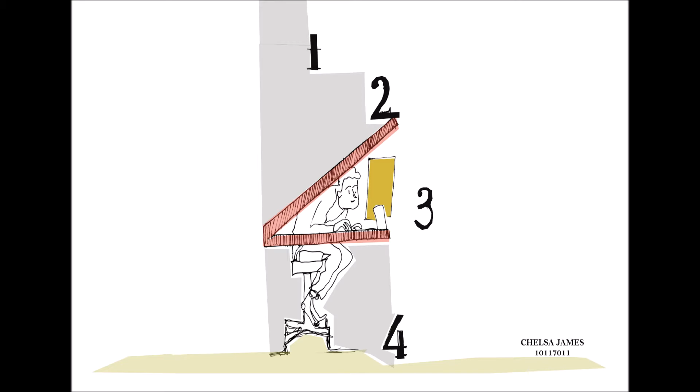The topic I have undertaken is rethinking the design of residential schools in view of the pandemic COVID-19. On March 11, 2020, the World Health Organization declared the spread of the COVID-19 outbreak a pandemic, and WHO reiterated the call for countries to take immediate actions and scale up response to treat, reduce the transmission, and save people's lives.

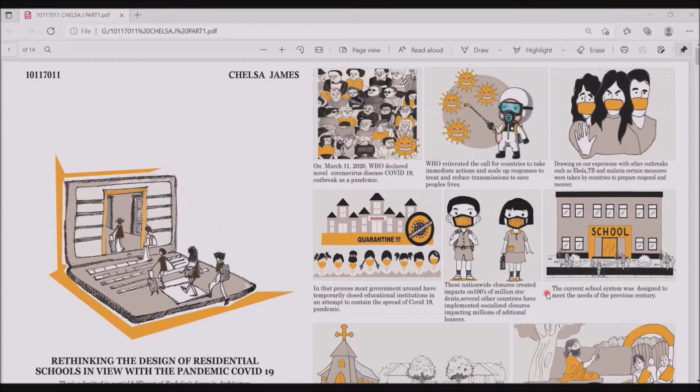Drawing on experience with other outbreaks such as Ebola, TB, and malaria, certain measures were taken. One such measure is closing down educational institutions to contain the spread of COVID-19. These nationwide closures impacted millions of learners. If we look, we can see that the current school system was designed to meet the needs of the previous century. If we look back, schools were very small operations in religious centers like churches, temples, or homes.

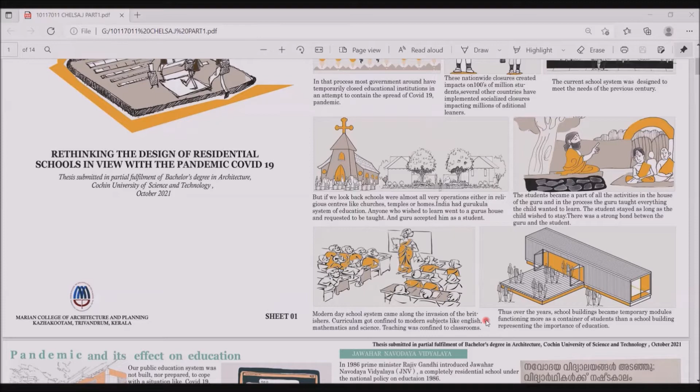India had the Gurukula system of education, which made students become a part of all the activities in the house of the Guru. The modern-day school system and curriculum got confined to modern subjects like English, maths, and science. Thus, over the years, school buildings became temporary modules functioning more as a container of students than a school building representing the importance of education.

Pandemic and its effect on education. Our public education system was not built nor prepared to cope with a situation like COVID-19. We lack the structures to sustain effective teaching and learning during the shutdown. In this process, children's academic performance is deteriorating during the pandemic, along with their progress on other developmental skills. COVID-19 resulted in the largest online movement in the history of education.

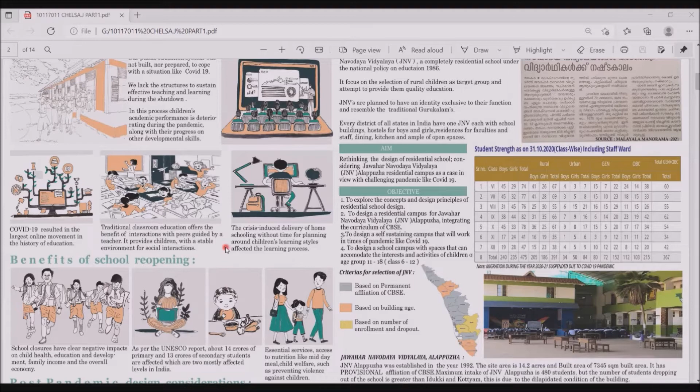Traditional classroom education offers the benefits of interaction with peers guided by a teacher. It provides children with a stable environment for social interaction. The crisis-induced delivery of homeschooling without time for planning around children's learning styles affected the learning process. School closures have clear negative impacts on child health, education, development, family income, and the overall economy.

In 1986, Prime Minister Rajiv Gandhi introduced Jawahar Navodaya Vidyalaya (JNV), a completely residential school under the National Policy on Education 1986. It focused on the selection of rural children as a target group and attempted to provide them quality education. Every district of all states in India has one JNV each, with a school building, hostels for boys and girls, residences for faculty and staff, dining, kitchen, and ample open space.

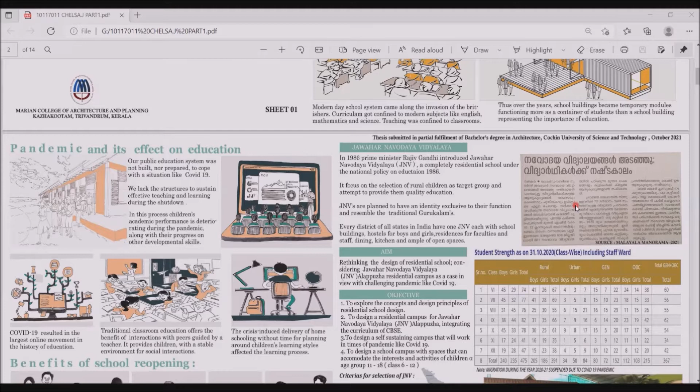This is a newspaper clip which states how children of JNVs were affected during the pandemic. In spite of being completely residential schools, these were shut down, which led me to study more about JNVs. The aim of my project is rethinking the design of residential schools, considering Jawahar Navodaya Vidyalaya, Alappuzha residential campus as a case in view of a challenging pandemic like COVID-19.

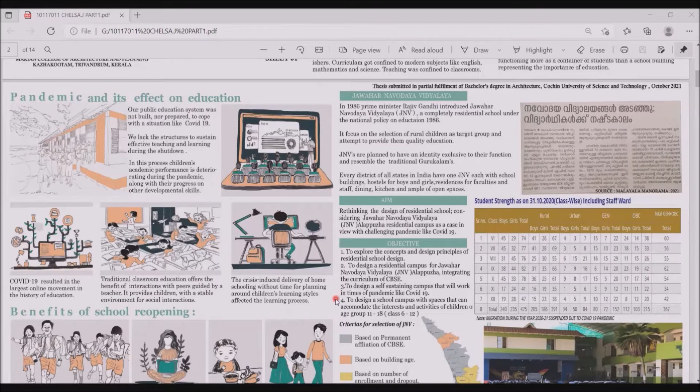And the objective remains to explore the concept and design principles of residential school design, to design a residential campus for JNV Alappuzha integrating the curriculum of CBSE, to design a self-sustaining campus that will work in times of a pandemic like COVID-19, and to design a school campus with spaces that can accommodate the interests and activities of children of age group 11 to 18. Criteria for selection of the JNV were based on permanent affiliation of CBSE, building age, and number of enrollments and dropouts.

JNV Alappuzha was established in the year 1992. The site area is 14.2 acres and the built area is 7,345 square meters. It has provisional affiliation of CBSE. Maximum intake of JNV Alappuzha is 480 students, but the number of students dropping out of the school is greater than Idukki and Kottayam. This is due to the dilapidated condition of the building.

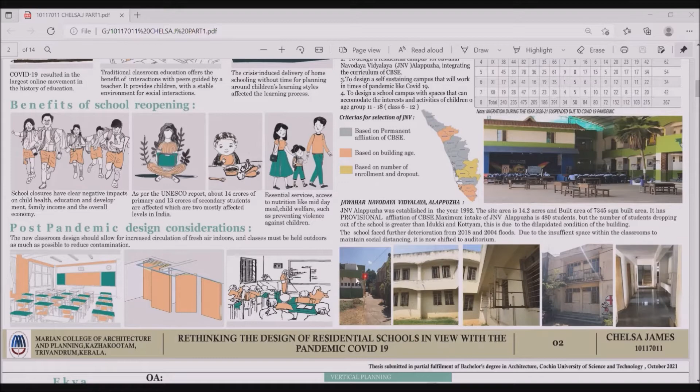The school faced further deterioration from the 2018 and 2004 floods. Due to insufficient space within the classroom to maintain social distancing, it is now shifted to the auditorium. And the school authority has planned a proposal for a new school building before the Navodaya Samiti, which strengthened my reasoning for choosing the school.

Moving on to the case study, the first one is Ekya, Bangalore by architect Sanjay Mohe. The attempt to create spaces that would understand the scale and energy of a child using elements of colors and varying volumes of building became the reason for choice. The types of spaces created within the school in varying forms, such as the OAT and playgrounds, evolved as a solid platform for learning through discussion.

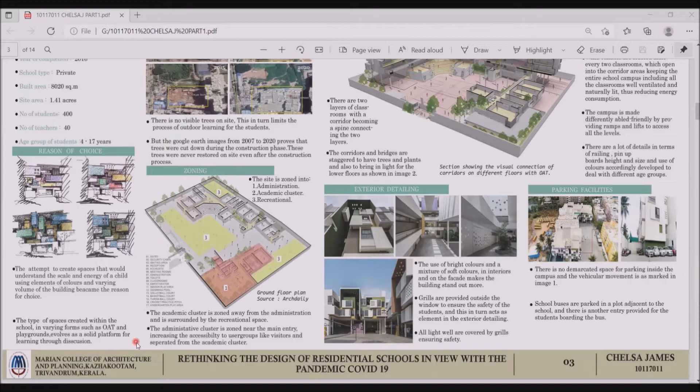The site is zoned into administration, academic cluster, and recreational. There are two layers of classrooms with a corridor becoming a spine connecting the two layers.

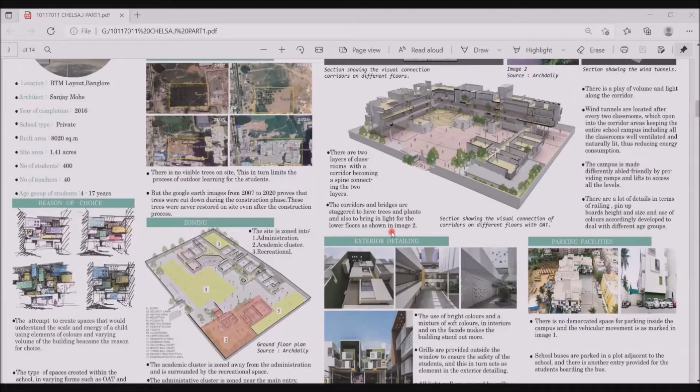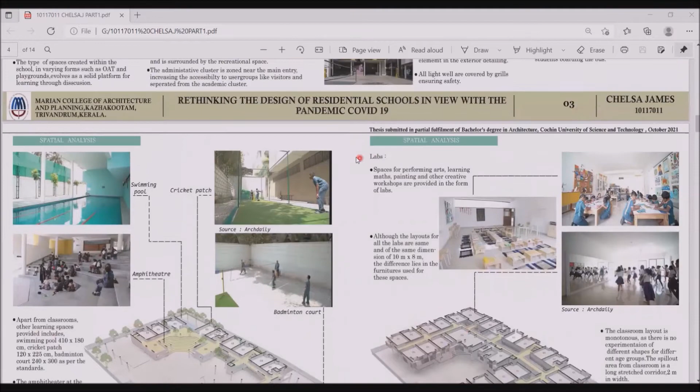The corridors and bridges are staggered to have trees and plants and also to bring in light for the lower floor, as shown in image 2. Spaces for performing arts, learning maths, painting, and other creative workshops are provided in the form of labs. The classroom layout is monotonous as there is no experimentation of different shapes for different age groups. The spill-out area for the classroom is a long stretch corridor 2 meters in width.

The next case study is Pallikoodam. Pallikoodam is a school that stands out in the field of education in terms of its educational curriculum, which includes workshops, interactive sessions, and active participation in social and environmental issues. Even after 48 years, the school stands out as a remarkable work of the renowned architect Laurie Baker.

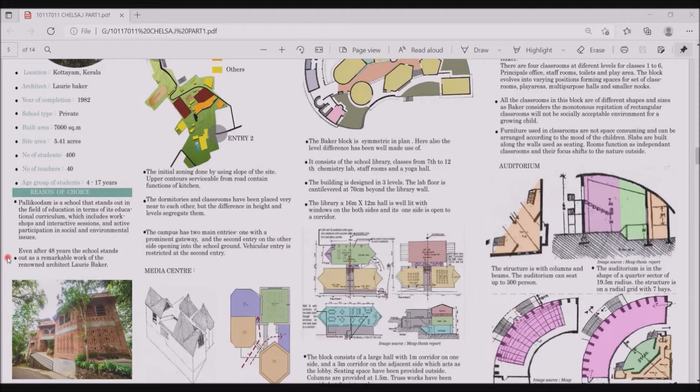The initial zoning was done by using the slope of the site. Upper contours are serviceable from the road and contain the functions of the kitchen. The campus has two main entries, one with a prominent gateway and the second entry on the other side opening into the school ground. Vehicular entry is restricted at the second entry.

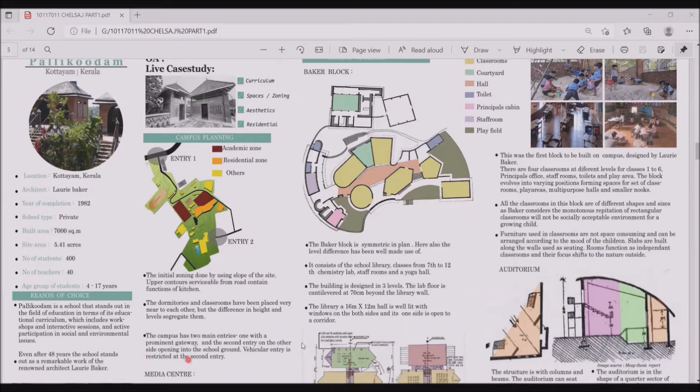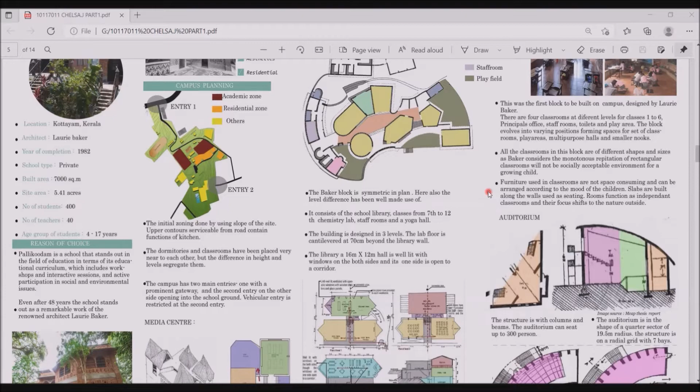The first block to be built on campus is designed by Laurie Baker, called the Baker Block. All the classrooms in this block are of different shapes and sizes, as Baker considers the monotonous repetition of rectangular classrooms will not be a socially acceptable environment for a growing child. Furniture used in the classrooms is not space consuming and can be arranged according to the mood of the children. Slabs are built along the walls used as seating. Rooms function as independent classrooms and their focus shifts to the nature outside.

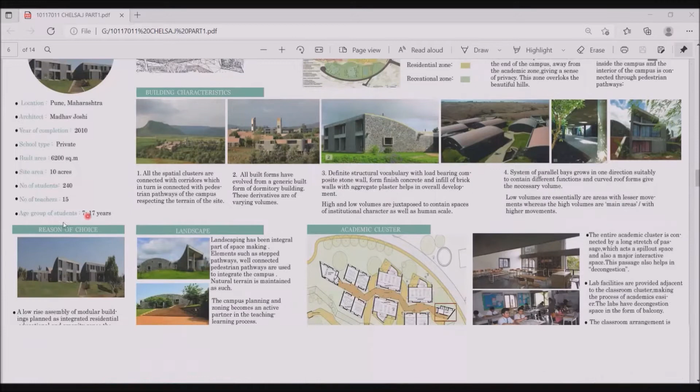Moving on, the third case study is Heritage School done by architect Madhav Joshi. A low-rise assembly of modular buildings planned as integrated residential, educational, and amenity zones. The campus is a good composition of open and built space, giving the young users a sense of place, containment, and security in the vast open surrounding and landscape. The concept of serial vision is an inherent part of the campus design, and one can explore the sequence of spaces differently on each visit.

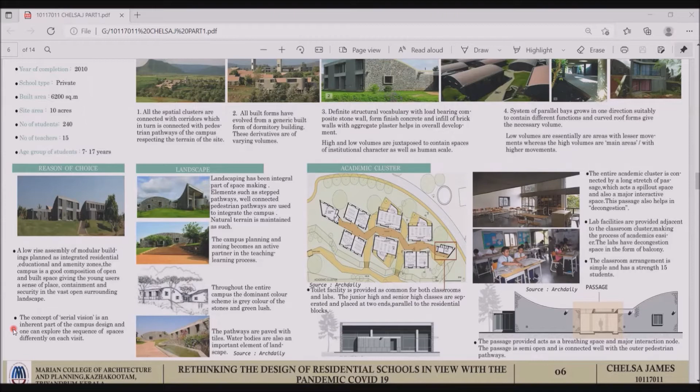All the spatial clusters are connected with corridors, which in turn are connected with pedestrian pathways of the campus, respecting the terrain of the site. A definite structural vocabulary with load-bearing composite stone walls, form finish concrete, and infill brick walls with aggregate plaster helps in overall development. The entire academic cluster is connected by a long stretch of passage, which acts as a spill-out space and also a major interactive space. This passage also helps in decongestion.

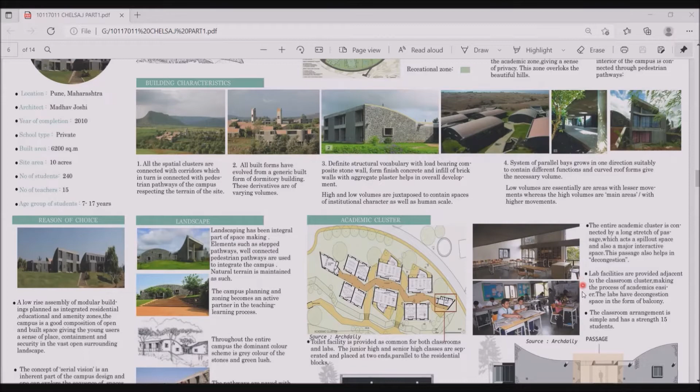Lab facilities are provided adjacent to the classroom cluster, making the process of academics easier. The labs have decongestion space in the form of a balcony. Classroom arrangement is simple, with a strength of 15 students.

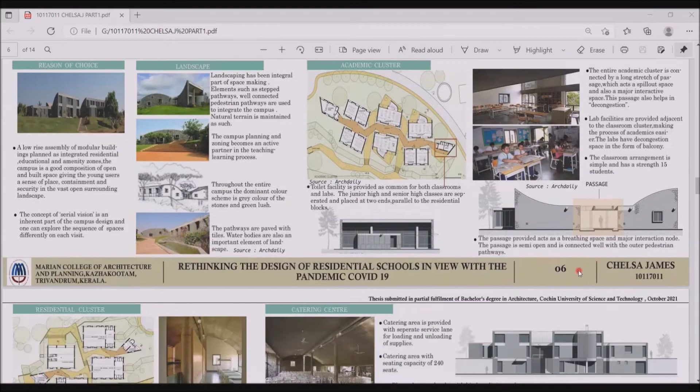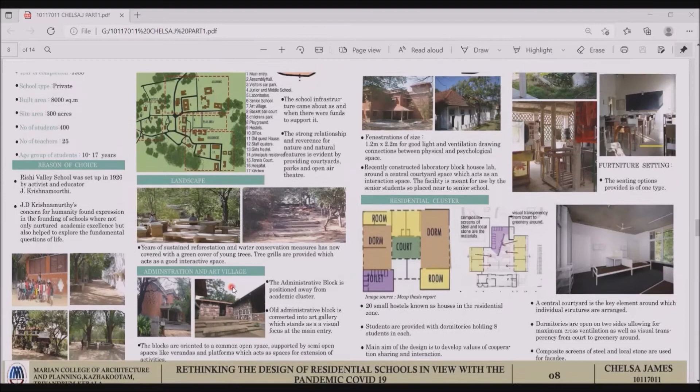Moving on, the fourth study is the Rishi Valley School, set up in 1926 by activist and educator J. Krishnamurti. J. Krishnamurti's concern for humanity found expression in the founding of schools which not only nurtured academic excellence but also helped to explore the fundamental questions of life. The basic campus planning uses the axis to zone the core area into residential, academic, and playgrounds. Years of sustained reforestation and water conservation measures have now covered it with a green cover of young trees.

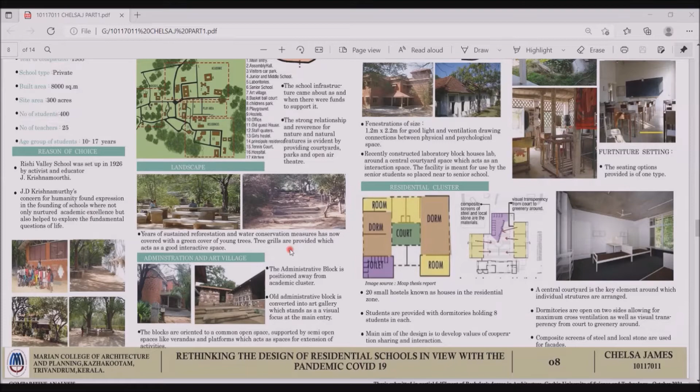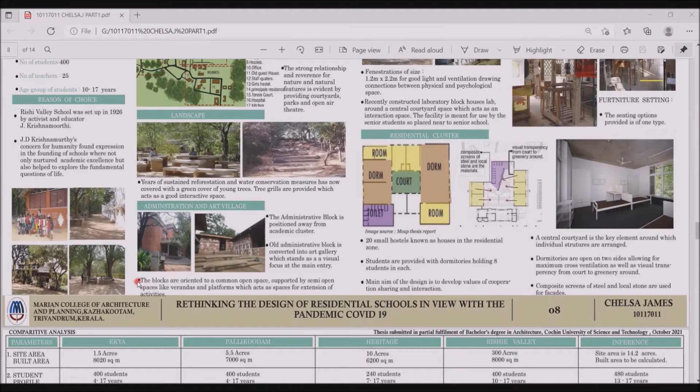Tree grills are provided, which act as a good interactive space. All the blocks are oriented to a common open space supported by semi-open spaces like verandas and platforms, which act as space for extension of activities. Classrooms are arranged around two courtyards with an east-west passage in the center for entry and exit. A central courtyard is a key element around which individual structures are arranged.

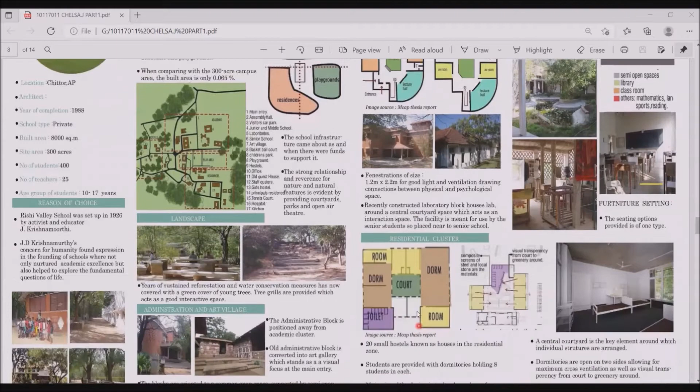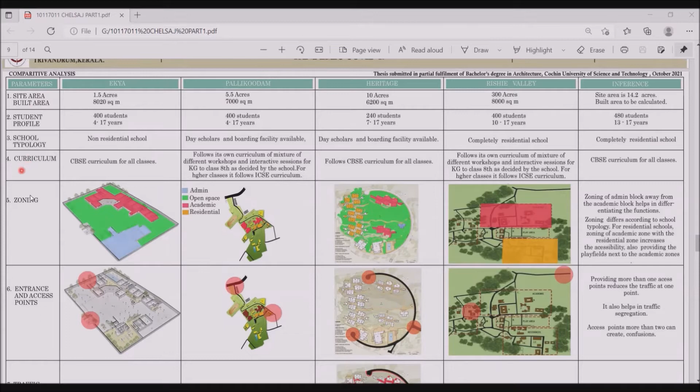Moving on to the comparative analysis, I've taken 14 parameters and the analysis follows this. Restricting the vehicular movement inside the campus increases the safety of students and reduces the noise. Connecting the campus throughout with pedestrian paths is an interesting element. Designing classrooms according to the age groups of the students should be considered. Monotonous repetition of classrooms should be avoided. The usage of a variety of seating options using different sets of furniture can increase the interaction and activity inside a classroom.

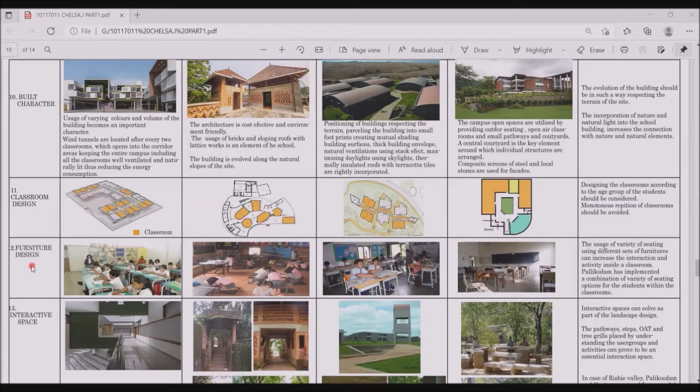Moving to the response to the pandemic, in school AKIA, grades KG to 12 are placed in one single block, increasing the density. Also, the spill-out space from the classroom is a 2 meter wide corridor.

Pallikodam has different blocks for administration and academics, where the academic block is further broken down according to age, which has immensely reduced the congestion. But being a day boarding school made a negative impact on the functioning of the school.

Heritage 2 is widely spread across the site and class capacity is a maximum of 20 students. The spillout space is a corridor connected with the pedestrian path of the campus, thus reducing the congestion. Rishi Valley, being a completely boarding school, made it possible to work even during the pandemic. The campus consists largely of open space, maintaining the air quality.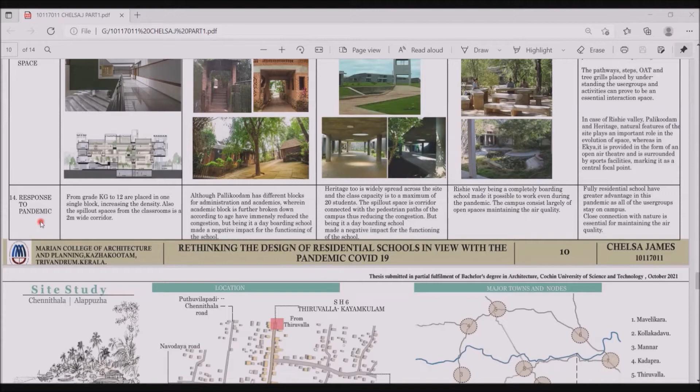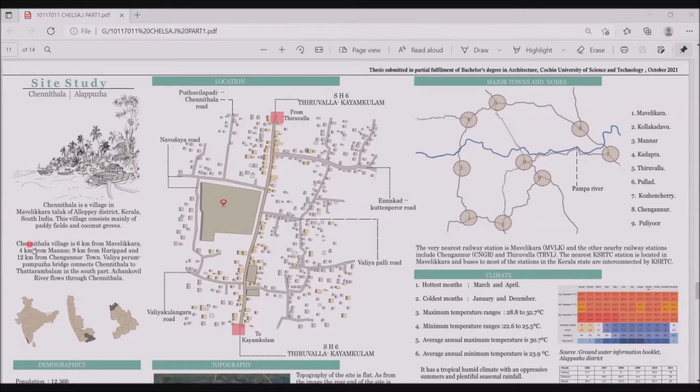Moving to the site study, the site is situated in Chennithala, a village in Mavelikara Taluk, Alappuzha district, Kerala, South India. This village consists mainly of paddy fields and coconut groves. Chennithala village is 6 km from Mavelikara, 4 km from Mannar, and 9 km from Harippad. It is a tropical humid climate with oppressive summers and plentiful seasonal rainfall.

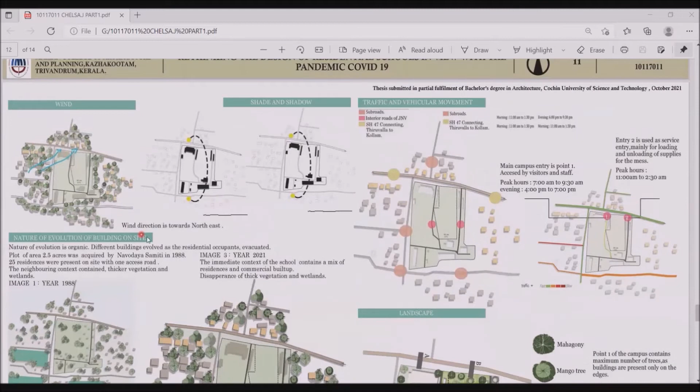The wind direction is towards the northeast, and the nature of evolution of buildings on site is organic. Different buildings evolved as the residential occupants evacuated. 2.5 acres was acquired by Navodaya Samiti in 1988. Image 3 represents the year 2021. The immediate context of the school contains a mix of residential and commercial built-up. Disappearance of thick vegetation and wetlands is evident.

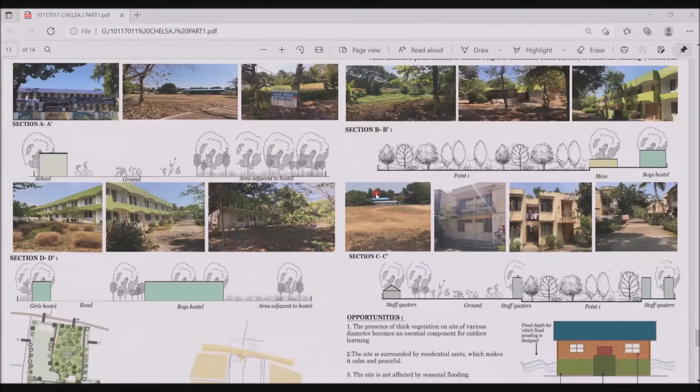Moving into the landscape map, point 1 of the campus contains the maximum number of trees as buildings are present only on the edges. Moving to the SWOT, the strength of the site is that it is easily accessible because the state highway SH 47 connects major towns like Thiruvalla and Mavelikara. The site is bound by sub-roads on 3 sides. The site is not affected by seasonal floods. Presence of thick and diverse tree species on site marks the major landscape.

The presence of SH 47 is a major source of noise on site, as the current school building is placed in close proximity to the road. No tree buffers are present. The presence of thick vegetation on site of various diameters becomes an essential component for outdoor learning. The site is surrounded by residential units, which makes it calm and peaceful. The site is not affected by seasonal flood, and the presence of riverine alluvial soil is good for landscaping.

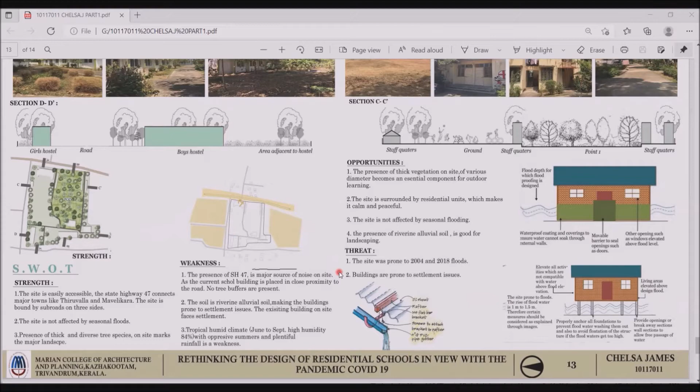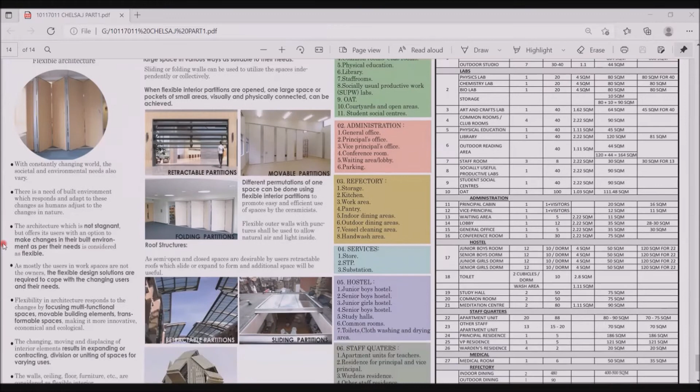Moving on to the special topic, flexible architecture: architecture which is not stagnant but offers its users an option to make changes in the built environment as per their needs is considered flexible. Flexible design solutions are required to cope with changing users and their needs, focusing on multifunctional spaces, movable building elements, and transformable spaces. The changing, moving, and displacing of interior elements results in expanding or contracting divisions or utilizing spaces for varying uses.

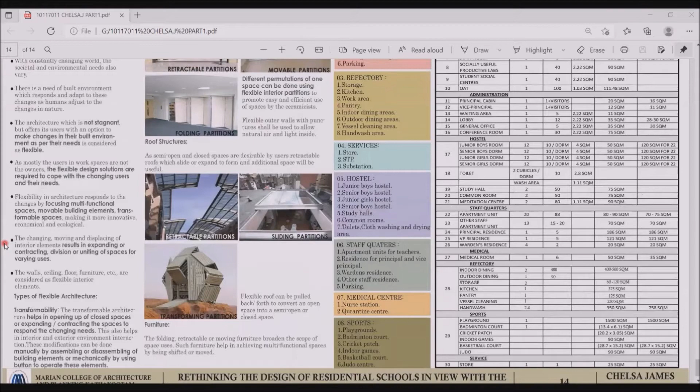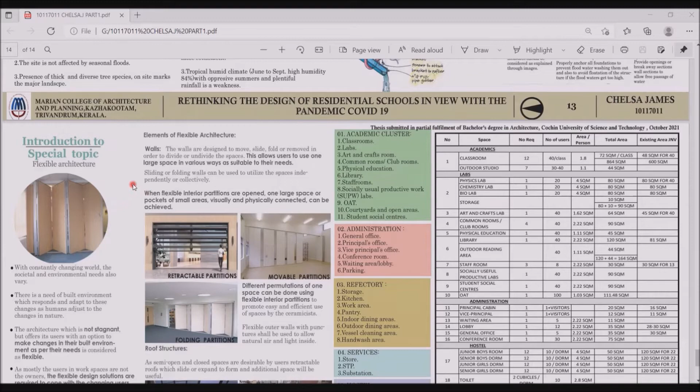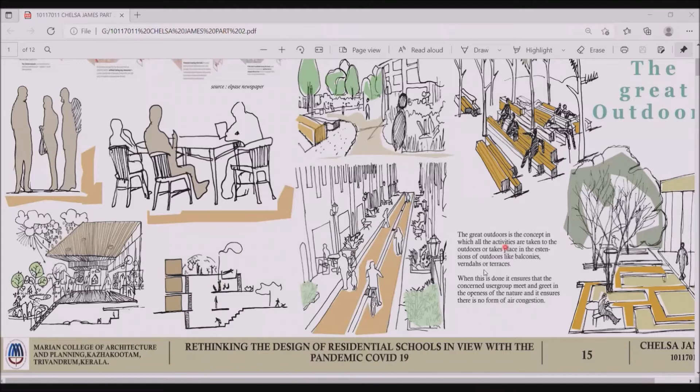As in Milan, Italy, during the lockdown, the balcony became a space for expression of anxiety, isolation, appreciation, and reaching out to the community. When this is done, it ensures that the concerned user group meet and greet in the openness of nature, and it ensures that there is no form of air congestion.

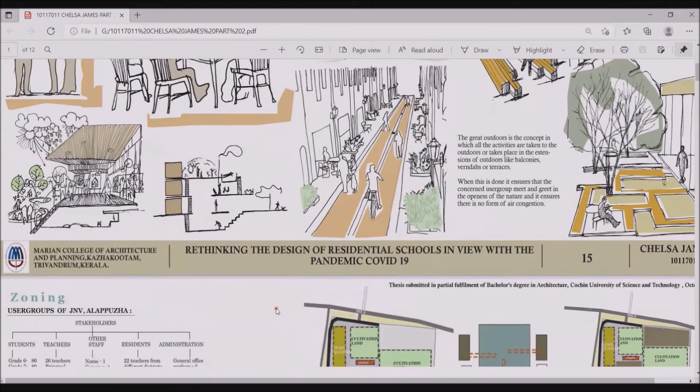Coming to the user group of JNV Alappuzha, there are 620 people on campus, of which 140 people daily commute to get necessary supplies and others. Active hours of the school include 17 hours 30 minutes, and passive hours include 6 hours 30 minutes. There are entities: school, staff quarters, mess, hostel, of which maximum occupancy in terms of time and space belongs to the school and hostel.

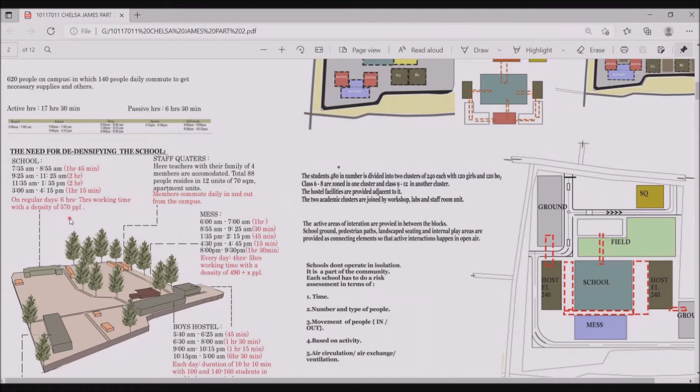On a regular day, during 6 to 7 hours of working time, a density of 570 people occurs in school, and an everyday duration of 10 hours 10 minutes with 140 to 160 students in 2 blocks takes place in the hostel. So basic zoning is carried out to manage the crowd whenever the need arises. The total of 480 students is divided into 2 clusters of 240 each. The school is also divided into 2 parts with separate entries to accommodate the 240 students from each cluster.

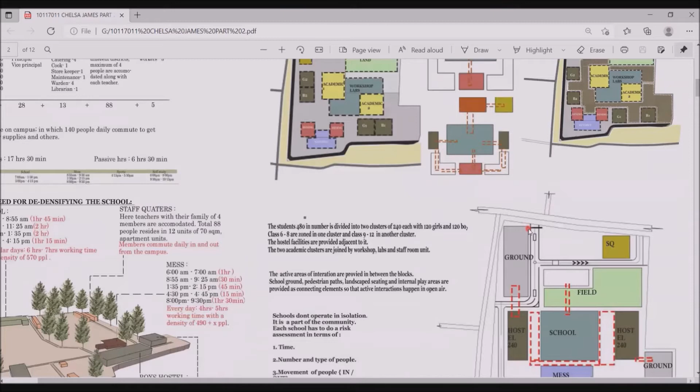With kitchen and serve counter being a common entity, the dining spaces are also divided to accommodate 240 people in each cluster. So in the interior parts, we have the school, hostel, and the mess in close vicinity. And in the front part of the site, we have the entities like staff quarters and administration block, so that the people who come from outside remain in the front part only.

In spite of being divided internally between the school, hostel, and mess, the active areas of interaction are provided in between the blocks in the form of school ground, pedestrian path, landscaped seating, and internal play area. These act as connecting elements so that the active interaction always happens in the open air.

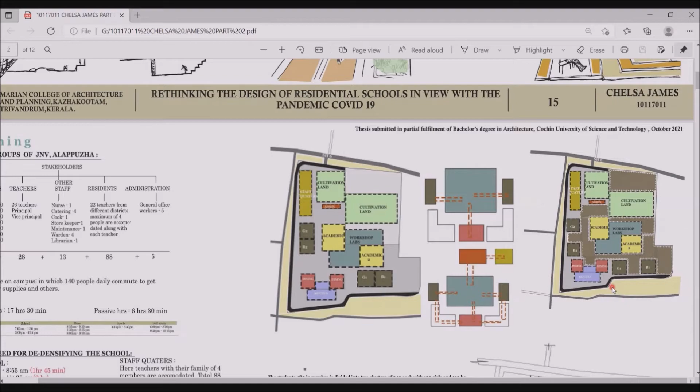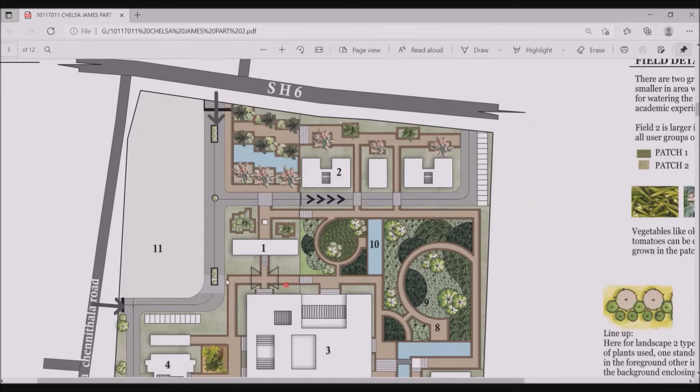Moving from zoning to the master plan, the main approach to the site is taken from SH6 and another access taken from Navodaya Chennithala Road. The main road connects the entire site. Parallel to the main road runs the pedestrian path, which connects the administration building, hostel, field, and mess. We have a field in the south side.

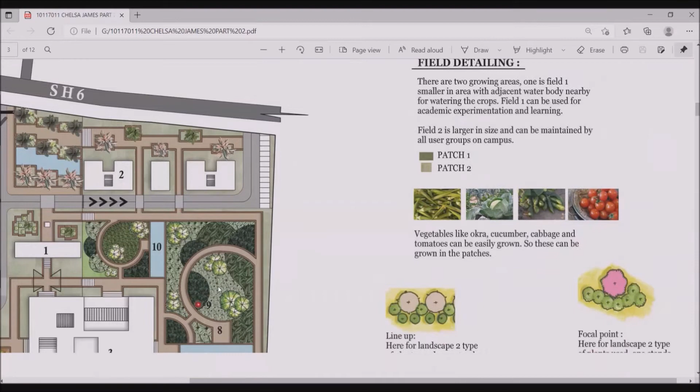With field 1 and field 2, field 1 being the smaller patch with an adjacent water body nearby for watering the crops. Field 1 can be used for academic experimentation and learning. Field 2 is larger in size and can be maintained by all user groups on campus. Vegetables like okra, cucumber, cabbage, tomatoes can be easily grown in the patches.

Coming to the landscape typology, there are 4 forms used: lineup, focal point, weave, and drifts. In lineup, 2 types of plants are used, one in the foreground and the other plant in the background. In the interior parts, we have the weave, where plants come in and out of focus, and the drifts, that is a grouping of the same plants, used in the interior parts of the master planning.

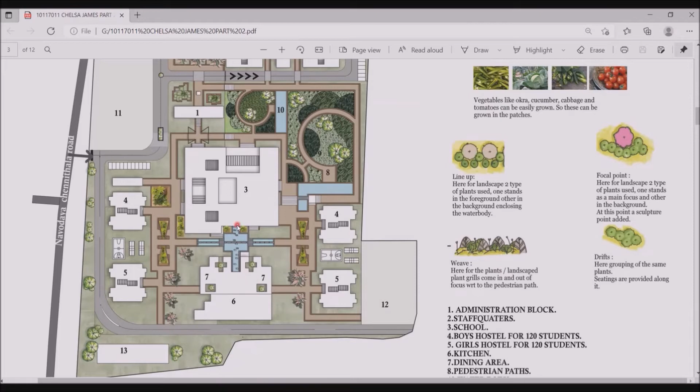In the interior parts we have the school, the hostel, and the mess, and they are all connected by the pedestrian paths, and a water body as an element connects the school and the mess, which also gives a visual aesthetic. Moving to the individual plans, coming to the school plan.

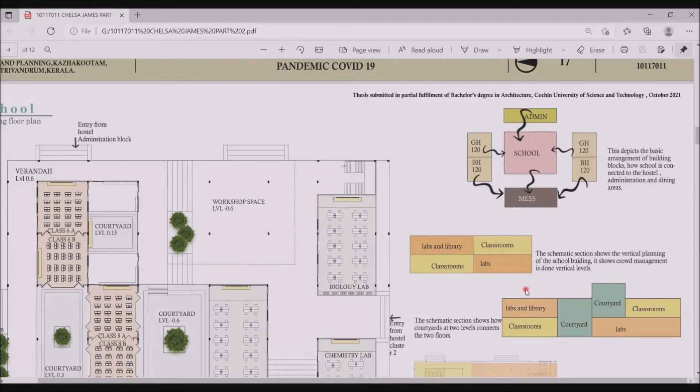The school is planned to become a connecting entity to the hostel cluster in the north and south side, mess and administration block, and it has multiple entry points. The ground floor of the school is planned in such a way that it has classrooms for class 6 to 8 arranged on one side and spaces that are occupied only on a timely basis, like labs, on the other side.

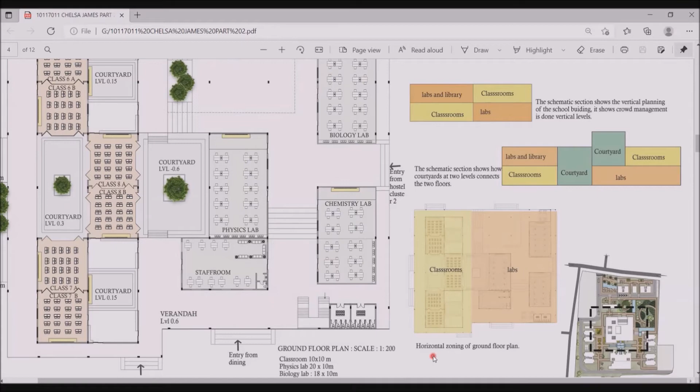Vertically above the classroom on the ground floor, we have labs and library, and that too is occupied only at certain times. And below the classroom cluster on the first floor, we have labs, and thus the density of people is reduced vertically. To bring in a visual aspect, courtyards at 2 levels are used, separate yet connected through outdoors. A module that can be arranged in n different types is used in the arrangement of classrooms.

We have courtyards of different dimensions enclosing the classroom. A shared space is provided as a locus space for 3 classrooms. Each classroom can be expanded using folding doors, and these are the folding doors. We have classroom 6A, 6B. There is one separating folding door, and the yellow line indicates the fixtures of the permanent blackboard, the places where the blackboard is present.

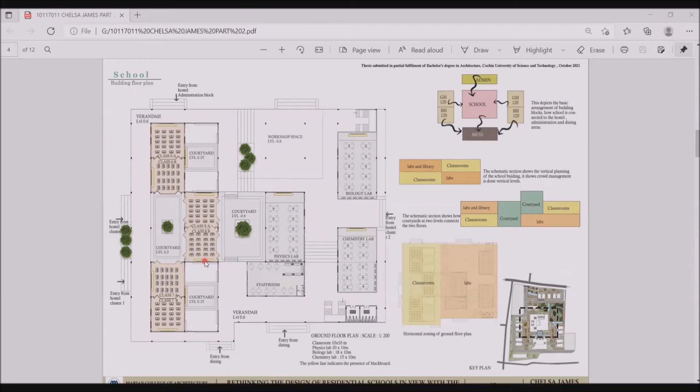The next plan shows how the classroom can be expanded into the courtyard in need of larger learning space. That is a strategy used for pandemic times. For example, if class 6A is occupying the space, class 6B can move to the courtyard space. Once it moves out of the classroom, the learning happens in the form of group discussions, group gatherings. It becomes more informal.

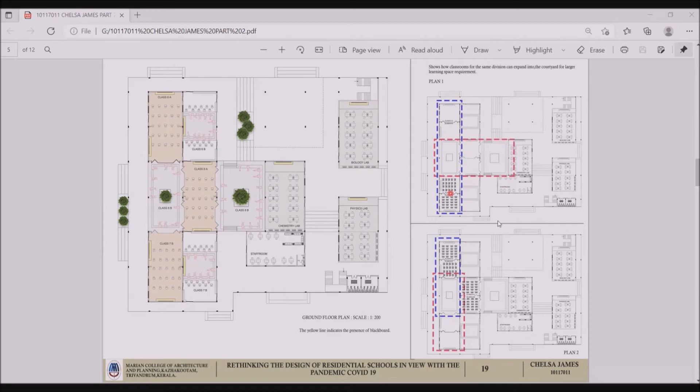The same happens in the cluster of 7A and 7B. And in the middle part, if class 8A is happening in this space, 8B can move either to this courtyard or to this courtyard. So there's an n number of possibilities in which classroom teaching and learning can be conducted. And plan 1 shows the other permutations or combinations in which the classroom can be arranged.

For example, in plan 1, as indicated here, if you open up the folding doors, we get a larger space, and this space can be used as a workshop space for conducting an internal workshop for class 6, 7, and 8.

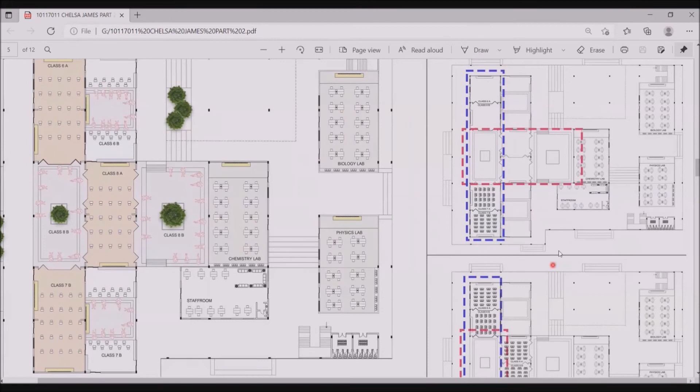And there is another permutation in which, if we expand the space, we get a mixture of built, semi-built, and built. So this entire space can yet be used for conducting another workshop. So we have this type of combination. Another combination includes a mixture of built, and we are taking up one more courtyard as highlighted in blue and red color.

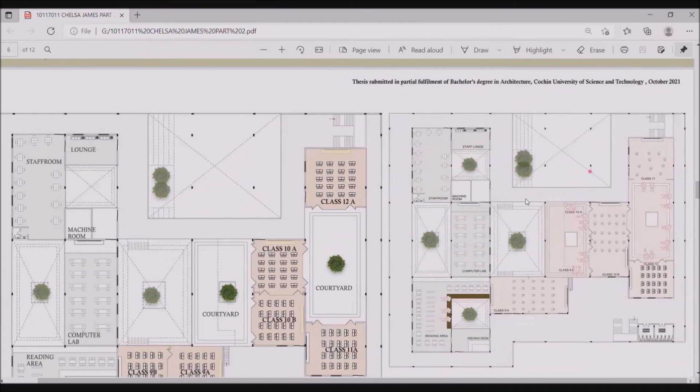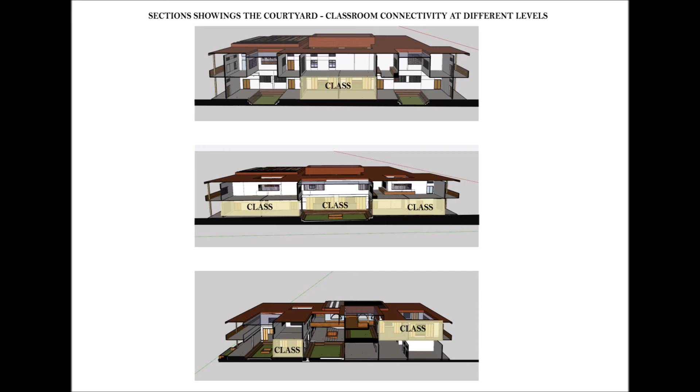Moving to the first floor, here on the north side, we have labs, library and staff room. And here also the expansion of classrooms in need of larger spaces is depicted as in plan 1. And the n number of combinations in which the classroom can be arranged is also shown. This is the section showing how classes are expanded in the courtyards and their connectivity to different floor levels.

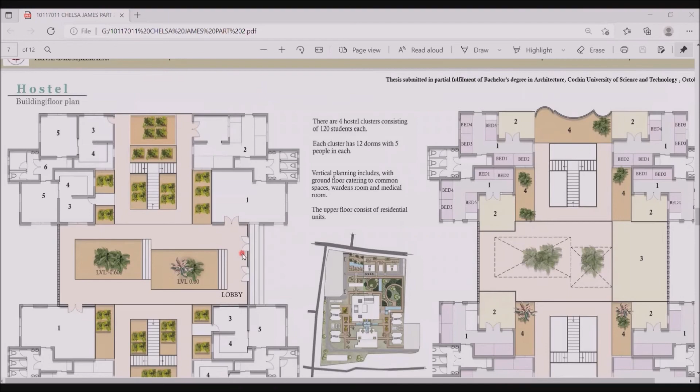The hostel block plan: the flexibility comes in the form of balconies. One hostel block contains 12 dorms with 5 people in each, and vertical planning includes the ground floor catering to common spaces like waiting lounge, warden's room, and medical room, and the upper floor consists of residential units. And this is the typical floor plan of first and third floor.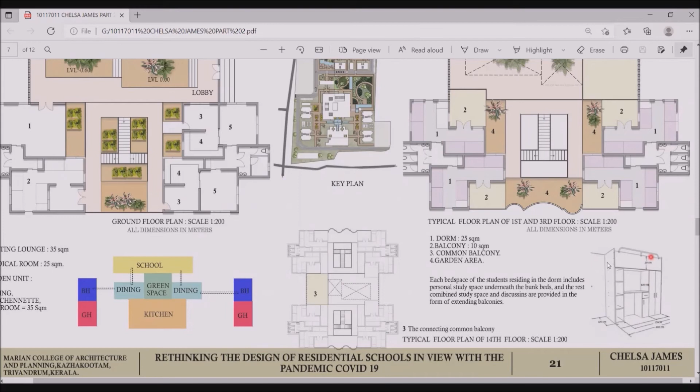Here we have dorms, and each bed space of the students residing in the dorms includes a personal study space underneath the bunk beds, and the rest, combined space and discussions, are provided in the form of extending balconies. Coming to the section, Section AA shows the connection of balconies at each level, which becomes an expression of outdoor feeling in the interior. There are private balconies for each dorm and common balconies as a connecting element for the dorms on each floor.

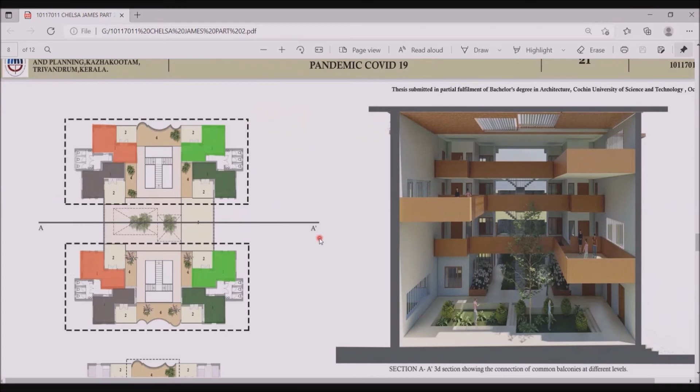There are 8 dorms on one floor, and they are connected by a common balcony as indicated in space 3. And garden balconies are provided with a sunken slab that can be used to grow plants. This too brings in an outdoor feeling to the interior. Dining floor plan.

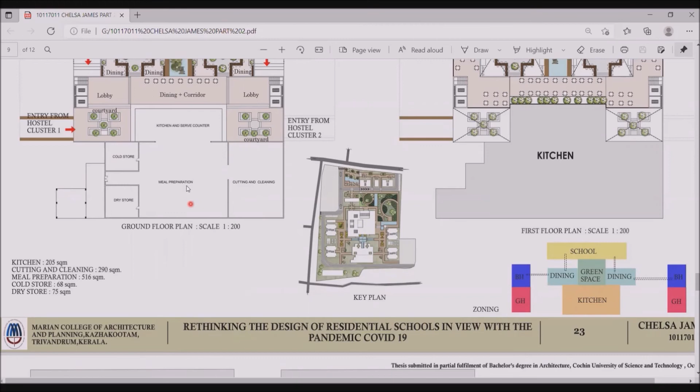The zoning depicts how the kitchen becomes a common entity to separate dining for each hostel cluster. In the rear part, we have the dry store, cold store, meal preparation area, and cutting and cleaning. And in the front part, we have the dining area, and it is interlinked by a green space.

Dining is planned in 2 levels with common kitchen and serve counter. Ground floor dining area is a semi-open area. The marked space is at 0.00 level and is connected with a pedestrian path. It acts as the extension of the pedestrian path and the garden area. The ground floor dining area can also be used as a learning space, hence flexible. The red highlighted space is the open part of the ground floor dining area.

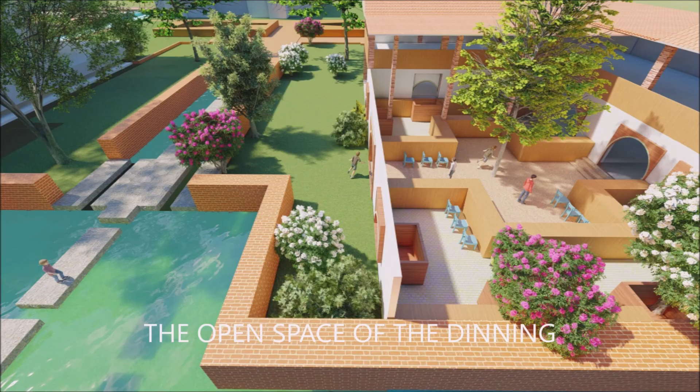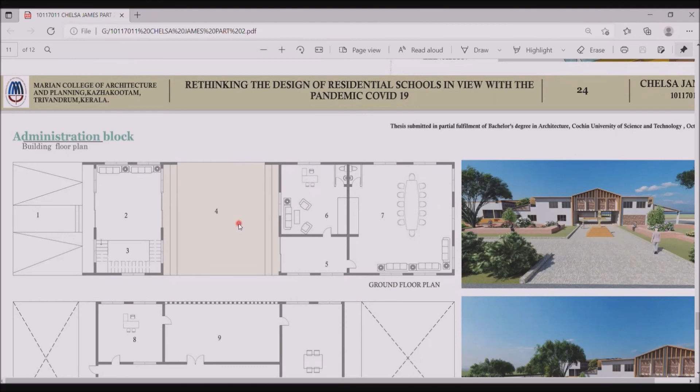Administration block plan: a semi-open transition space divides the building into 2 parts to manage the crowd, as we have visitors from outside reaching the building. An essential separation is brought in. All the common areas, like the waiting lounge, are arranged on one side, and the principal office and meeting rooms are separated from the public space by the semi-open transition space. The building is well ventilated.

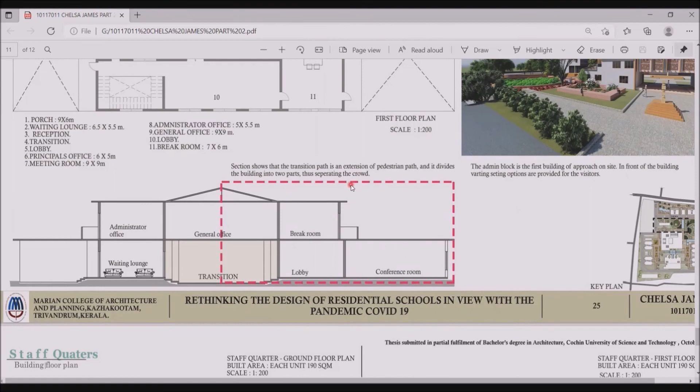And the section shows the transition path is an extension of the pedestrian path, and it divides the building into 2 parts, thus separating the crowd. And the 3D image shows that the admin block is the first building of approach on site, and in front of the building, varying seating options are provided for the visitors.

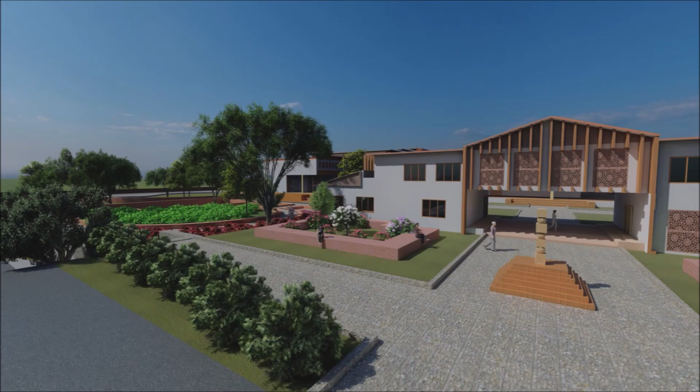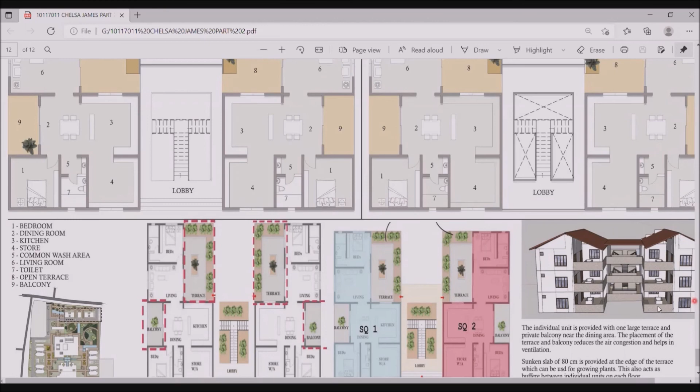The staff quarters plan: each staff quarter unit is 190 square meters, and we have facilities like bedroom, dining room, kitchen, store, common wash area, living room, toilet, open terrace, and balcony. The individual unit is provided with one large terrace and a private balcony near the dining area. The placement of the terrace and the balcony reduces the air congestion and helps in ventilation.

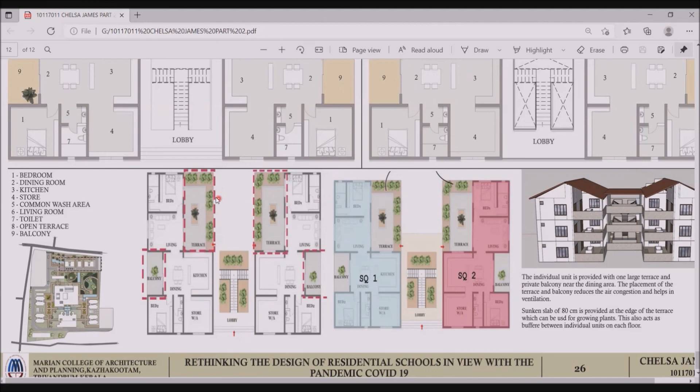A sunken slab of 80 centimeters is provided at the edge of the terrace, which can be used for growing plants. This also acts as a buffer between the individual units on each floor. And when we look into the floor plan, there are 2 units on one floor connected by the staircase.